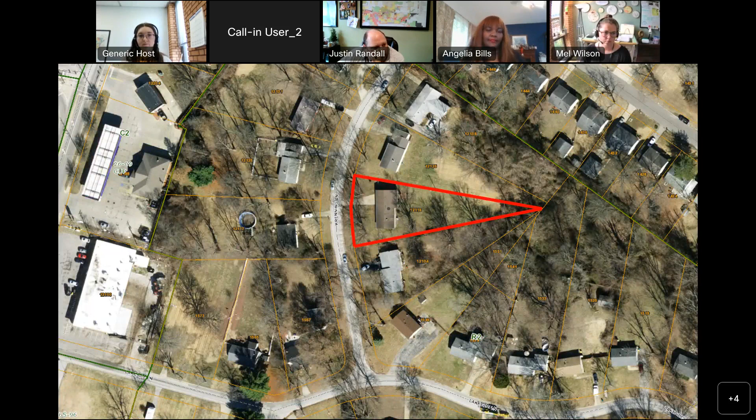Okay, I put in this request because I was unfamiliar with the process. First of all, when I had built this carport, I think I was asking for an exception because it was offset by, I think, 5 feet, 6 inches, compared to the 10 feet side yard.

Okay, have you already constructed the carport? Yes, I had. And then, excuse me, one of the people was out inspecting someone else's yard for a complaint, and saw that I had constructed it, and said that I needed a permit, and I had to go through the process. Okay.

And what was the reason for the hardship for your variance? It wasn't necessarily a hardship. When I had spoken to the person from Public Works, they said I had to put in an exception.

And then I had to attend this meeting to see if I was approved for my exception. So the hardship is why the carport can't be located 10 feet from the property line, which is the zoning ordinance requirement. So that's what the chair is asking, is why you need the 1 foot in lieu of the 10 feet from the property line.

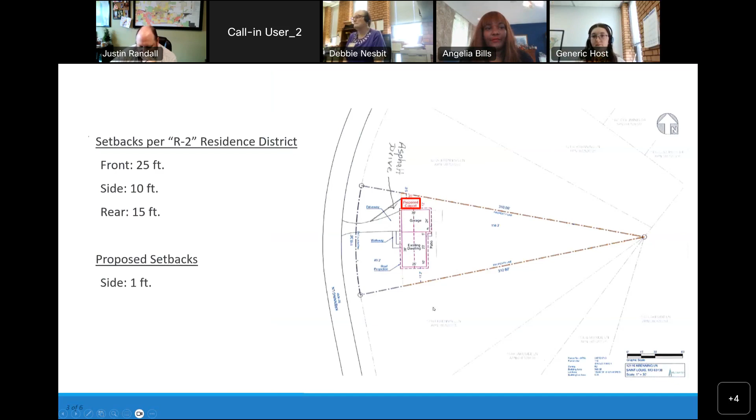33-23, I vote to approve the variance as advertised, with the hardship being the odd shape of the lot. I think that's fair. I'll second that motion.

Staff, the only question I have is whether there's a condition you want that the asphalt driveway be done. He would have to do the pavement. If he didn't pave it, he'd have to come back to the board to ask to use a different material, because of the zoning district. Perfect. Then I second the motion as it was stated.

Okay, all those in favor? Aye. Aye. Okay, and against. It passes.

32-23, Mark and Laura Rafe request an exception to the side and rear yard regulations and the off-street parking and loading regulations at 13281 Spindle Lane, maintaining a side yard of 1 foot in lieu of 20 feet and a rear yard of 4 feet in lieu of 20 feet for an 8-foot 4-inch fence, and to allow continuance of non-dustproof gravel rock in lieu of a paved area as required by the NU non-urban district regulations and section 1003.165 off-street parking and loading regulations of the St. Louis County Zoning Ordinance.

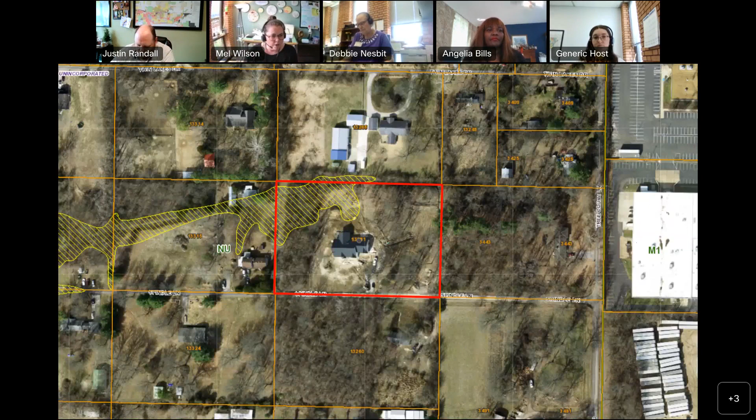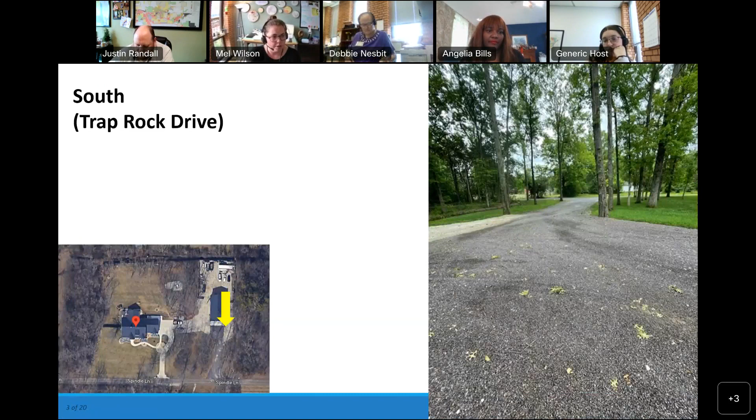The site photos here go counterclockwise around the site. There are two materials on site right now along the drive aisles. This darker material you see here is the existing driveway out to Spindle Lane. This darker material is a trap rock and meets the dustproofing method required by county transportation, so that material is fine.

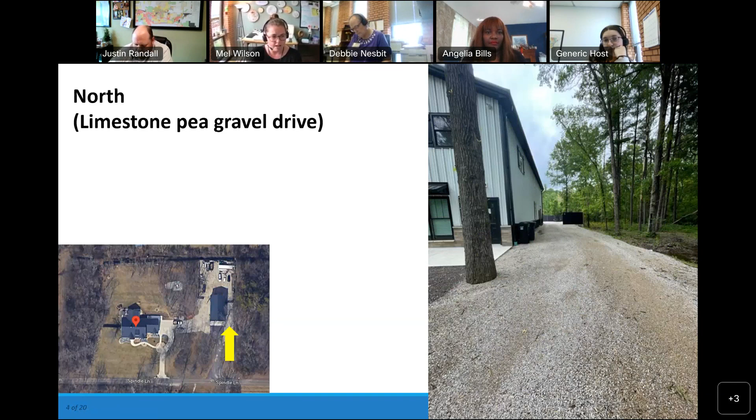This image going north, showing the eastern property line, this is the limestone pea gravel that the petitioner is requesting to maintain. As we move up the driveway, you'll see the fence. This portion is where it's 1 foot from the property line, and moving to the back of the site, the fence continues and the pea gravel exists.

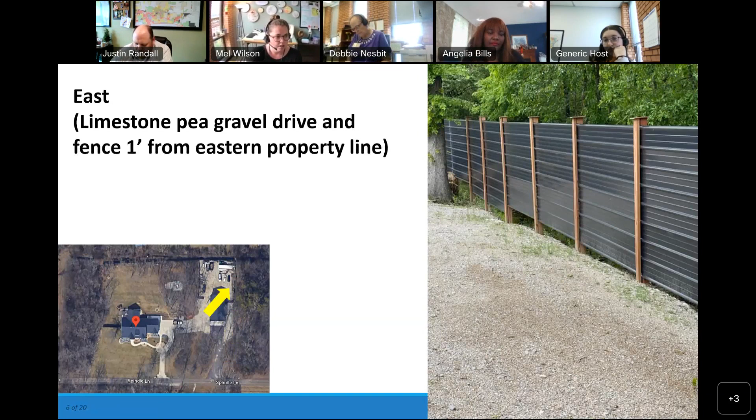The next few photos show the rear of the site, and then there's another portion of driveway that connects the garage to the primary structure. That's this limestone area here.

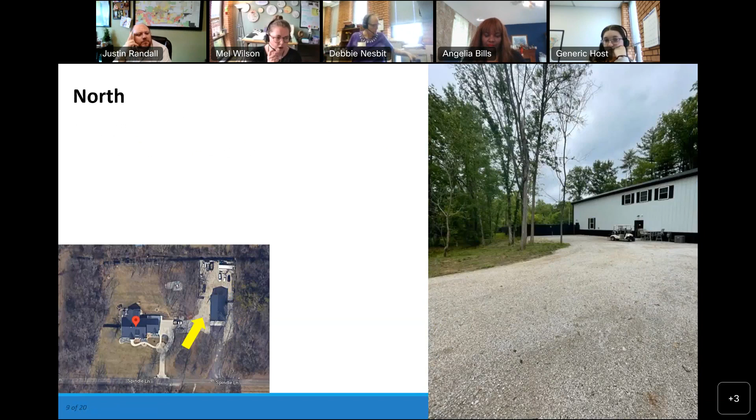For some context, I wanted to remind the board that this property was party to a request back in 2019 when the detached garage was originally proposed. There were two requests in 2019. The first was BZA 4819. The petitioner was requesting to build a 40-foot by 70-foot detached garage, which per our interpretation of the zoning ordinance would need a variance, as it would no longer be considered subordinate and accessory to the primary structure. At that time, the petitioner was also requesting to use a gravel material in lieu of a paved drive. The board denied those requests, both the size of the structure and the gravel drive.

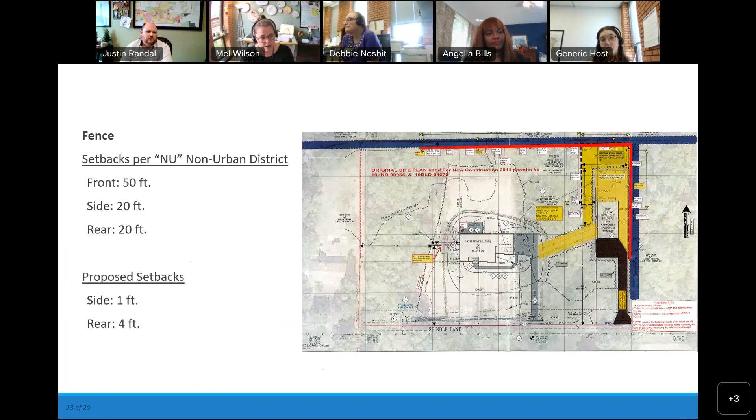The second request, oh, go ahead. Sorry, just real quick on that. So is it my understanding from the staff report that if the fence were 6 feet tall, it would be allowed on the property line? Is that correct? Right, it's the fact that it's over 6 feet. Once a structure exceeds 6 feet in height, you're considered a structure, and that's when you have to meet the structure setbacks. Correct, thank you.

So the second request is to maintain the gravel surface, the limestone pea gravel. It's about a 3/8 inch limestone gravel on site, to maintain that surface in lieu of either paving the drive or using one of the county's alternate dustproof methods.

So here is the regulation from the zoning ordinance: in all zoning districts, driveways have to be paved with a pervious or impervious pavement, except in the floodplain, the park and scenic, the non-urban, the Karst Preservation District, and the R1 Residence District, where you can use an alternate dust proofing method. The county has a list of materials, the chip and seal, trap rock, and other materials that don't kick up dust when they're driven over or disturbed.

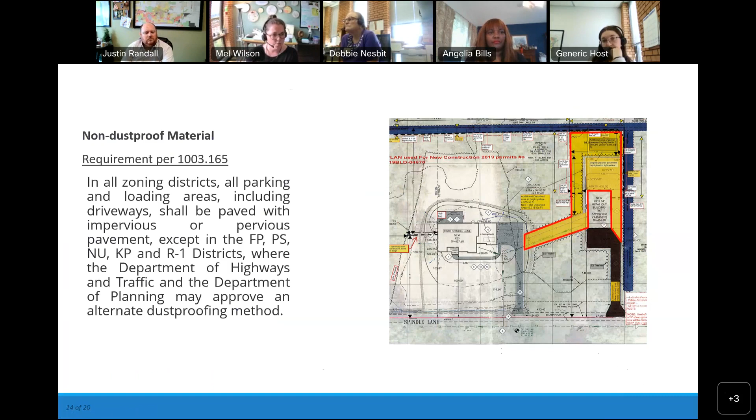So staff is recommending approval of the requested fence. There are many portions of the fence where it does not exceed 6 feet in height, where it's even less than 6 feet, so those portions don't need a variance. Along the eastern property line, the side yard shared with a neighbor's side yard, the fence is 6 foot 10 inches at its tallest, where it abuts that neighbor's property line. I would note that most of these residential tracts in this area are at least 3 acres in size, so there is space between the structures. Most of them are sort of central.

Additionally, we find that the petitioner has demonstrated a unique hardship on the site. There are some topographical issues and a creek nearby that have created some runoff constraints, and so allowing the fence to be a little bit taller leaves room at the bottom for the stormwater to flow through.

We would note, however, that even if the board grants the variance for the fence, the petitioner is still going to have to work with the Department of Transportation and Public Works to mitigate any land disturbance issues that resulted from laying this material and building the fence without a land disturbance permit. So we find that they've demonstrated a hardship to have this fence, but there may be other things they have to address even if the board grants this portion of the variance.

So we are recommending approval of the fence. We are recommending denial of maintaining the limestone pea gravel on site. We don't find that the petitioner has demonstrated a hardship to use this material. There are, as I mentioned, a list of dustproof materials and treatments you can do to these surfaces to make them dustproof, such as sealing them. And the purpose behind this regulation is to mitigate that dust and debris that comes from that gravel. The limestone specifically is one of the material types that is the reason we have the regulation, for the dusty gravel types like limestone. So for those reasons, we are recommending denial.

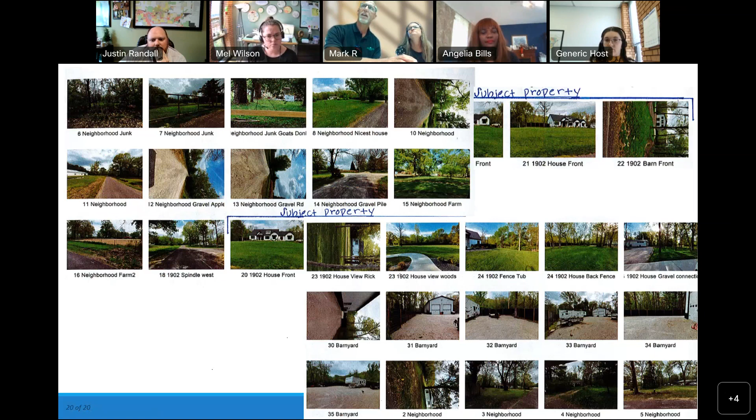So can you go back to the site plan that we presented? As the fence goes down to 1 foot on one side—if you go to the far left of that red line, it's 15 feet off of the property line. The reason is I had to follow the curvature of the swale, this hill that drops down into that floodplain area, and that's why it varies from 1 foot to 3 feet. On one side, most of the drainage area is on the neighbor's property, and on the opposite side, most of the drainage area is on my property. So it did not make sense to follow that distance off of the property line the whole way.

Any questions? Any questions I can answer for you guys? I don't have any, I don't think I have any right now. Thank you. Is there anyone here in favor or opposition?

I see one hand. All right, Bob, you should be able to unmute yourself. Can you hear us? Yes. Camera or no camera? You should be able to turn on your camera.

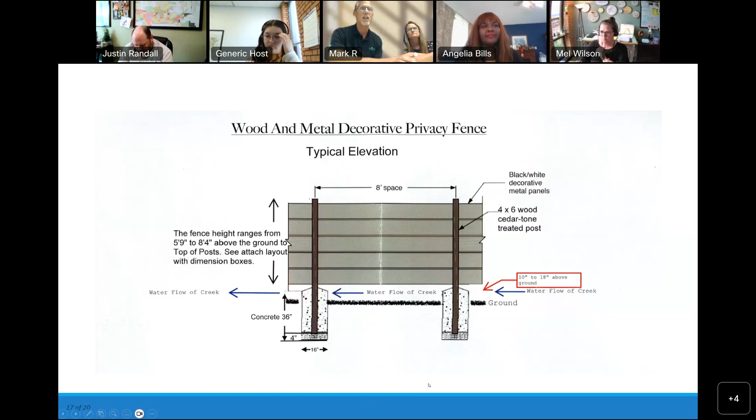No, actually — can you hear me okay? Yes. No, it's because we're adjacent to a major drainage swale that drains probably 60 to 80% of our entire neighborhood. I've seen that swale come up like a raging river, I've waded in it. It actually drains the other gentleman Dave Endry's property to keep water flowing. So we certainly don't want a fence below where that water flow is, and that fence, as you can see from some of the pictures, is at least a foot or more off the ground.

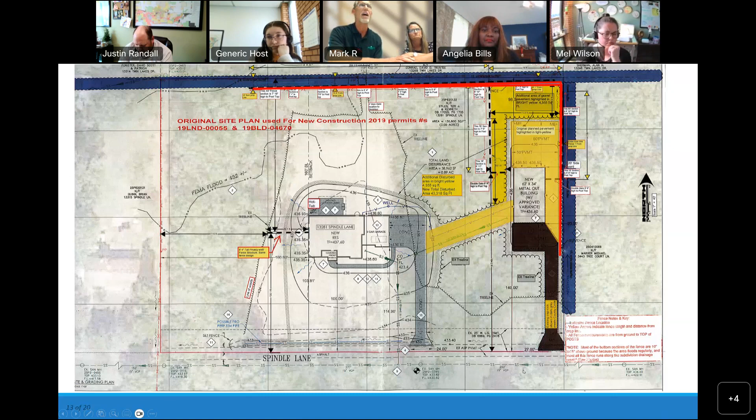At the end of the day, I'm trying to figure out what the other gentleman has against the fence. The fence wasn't built with any difference on either side — one side is white, one is black, but both have the same 4x6 posts exposed on both sides. In fact, even though the posts are on the outside, we put matching half-posts on the inside so it looks the same besides the color. I think the other gentleman probably has some other motives here. Not going to speculate, but I'm not sure why he doesn't like our fence compared to how some other properties are kept, namely Dave Endry's. I don't get it.

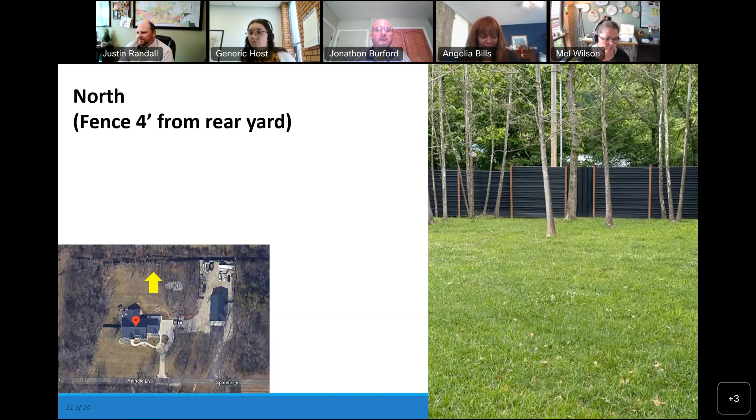Jonathon, don't mean to put you on the spot, but do you have any thoughts on what we've heard from two different attorneys regarding the height variance? What I'd suggest is, if you're looking for legal advice, we'll have to notice up a closed session for a future meeting and discuss these issues there. Well, yeah, we're hearing two totally different opinions on the variance, and in my understanding of it, I have an opinion as well, but yeah, that's my only question right now.

Okay, are you ready to vote, call for the motion? I move that we continue this to get legal opinions based on what we heard in the testimony today from the St. Louis County Counselor's Office. Okay, I second it. All those in favor? Aye. Aye. Okay, it's continued.

John or Mel, do we just continue it to a specific date, or is it just continued until we decide? To the next meeting — typically we just add them on to the next meeting. We'll work with Jonathon to make sure he has time to prepare additional information, but I'd expect we try to do it in 2 weeks. Okay, but we'll work on facilitating that offline. Awesome, thank you Mel. Sounds good, the motion is continued.